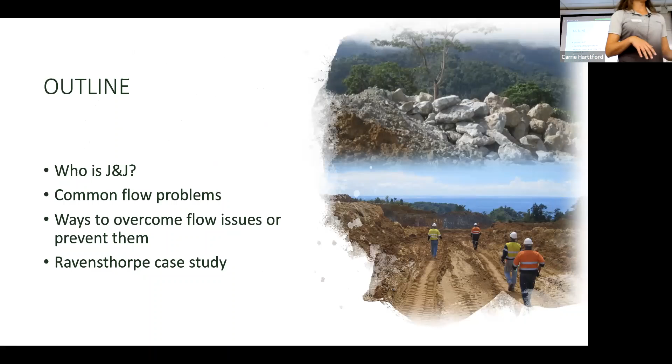Jenike Johanson is a very specialized engineering firm focused on helping our clients handle bulk material through their process. So they know what they want to make, but actually getting it through their process is often what holds back the plant and causes people to use a lot of hammers.

We've been in business for over 55 years. Dr. Jenike came over from Poland during World War II and wanted to make a difference in a field of research. He found that nothing had really been done in the field of bulk solids handling. It was just a black box.

You create a hopper, 30-degree hopper, 60-degree hopper, and hopefully it works. And if not, you just bang the heck out of it. He found that really no science had been applied to that.

So he went to the University of Utah in the 50s and 60s and developed this whole theory of solids flow, kind of the equivalent of Bernoulli's equation for liquids. He developed the equations for powders, dirt. And that's a science that's still used today.

We have offices all over the world: Australia, Brazil, Chile, Canada, an office in Houston, and our headquarters is in Massachusetts. Pop quiz: which office did I open up?

Australia. I did open up the Australia office. Ding, ding, ding. So, open that up about 10 years ago. I was there for 3 years with the family and got up and running. It's still going well. Lots of mining in Australia, to say the least.

So everything from on-site inspections—maybe there's something currently going wrong with our clients' plants—we figure out, kind of like the doctors, I call in the doctor, figure out what's going on. We run some tests to make a diagnosis of the problem, come up with recommendations to solve those problems. And then we can go further into computer simulations, which we'll talk about: discrete element method modeling.

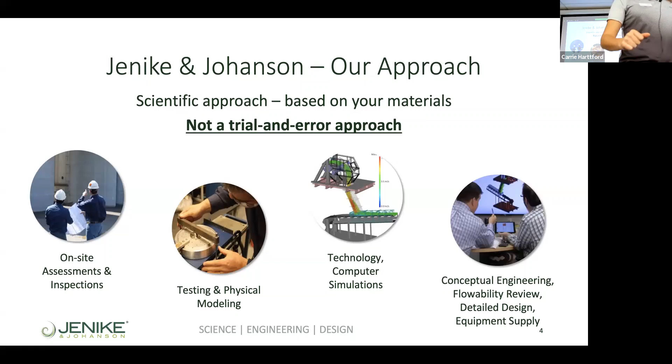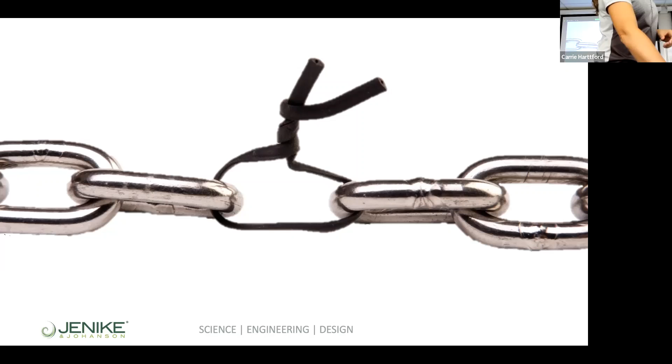So again, all industries, things you wouldn't even think about. Now, we have a chain. Does that look like a strong link? Not very strong, right? So often we find that bulk solids handling is actually the weakest link of the chain.

It's not the glorified part of your process, but yet that is probably the part of the process that will give you the most headaches.

So as you find the ore, you drill it, you blast it, you have nice big pieces of rock over there, easy to handle. As you reduce it in particle size, it can become more difficult to handle, especially based off moisture content, particle size, distribution. But at every step—blasting it, screening it, crushing it—you're adding value to that ore, right?

Because once it's in the ground, it can't add value to anybody. You dig it out, you reduce the particle size, you're adding value. Does that make sense? And that's what you guys are figuring out, right?

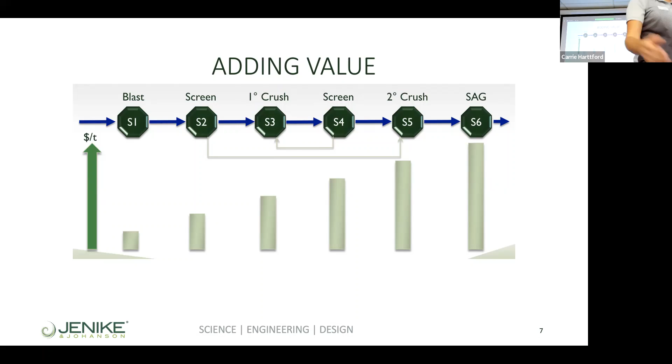But what happens if your material doesn't flow through that system? Then you don't get to add the value as fast as you want. You don't get to make as much money as you want to make.

So this is a very familiar scene to our clients. I love this one because it's very true. So you got the guy trying to bang on the side of the hopper. I'm going to show you some brilliant hopper photos, all dented in.

There's the guy trying to dig it out, and here's the manager. What's he jumping up and down about? This is costing time, right? Time is money, especially for mining, right? The throughput—it's all about throughput. And taking very unsafe actions to make this work, to try and get it to work.

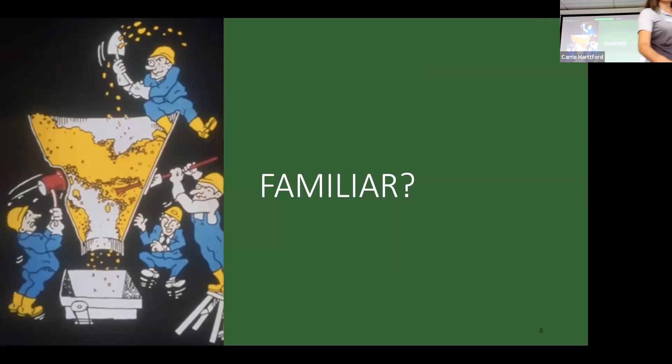So a phrase we say: it's not rocket science. It says, it's time we face reality, my friends—we're not exactly rocket scientists. Look at this, they're rockets.

But we actually say it's more complicated, because the material you're trying to handle can change throughout the process. It can change if the moisture content changes. It can change if you change the particle size. The way it flows changes. So that's what makes it difficult to design for.

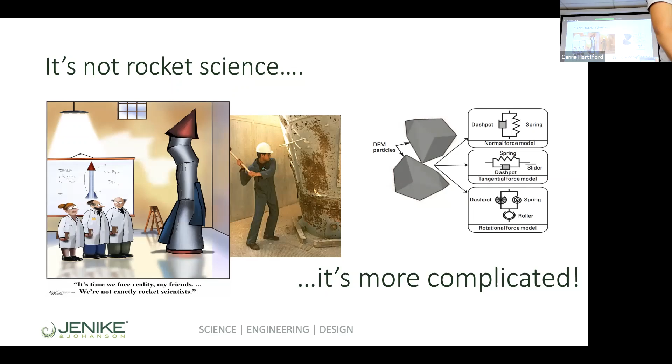Now, when you're going into your projects, your ability to influence your design is the greatest at the beginning, right? There's no steel on the ground. So however you design your whole handling process, you have a great ability to influence it. The cost of making a change is very, very low, as you see in the blue line.

So as you move from the study phase to the execution phase on the x-axis during your project timeline, you can see that cost starts to increase, especially once you freeze that scope. It starts to become more expensive to make changes, and once you start cutting steel, it's very expensive to make changes. Your ability to make positive changes decreases.

But look at the red line, the impact of a bad design. You don't see it, right? You don't see it till you come through the execution phase and you start up. And then what happens when the material doesn't flow through? It doesn't feel very good. It's a challenge. And unless you've lived through that, you as a fresh engineer might think, can't be that hard, I'm fine, I sleep really well at night. But if you've gone through the ringer and it doesn't work, it's a challenge.

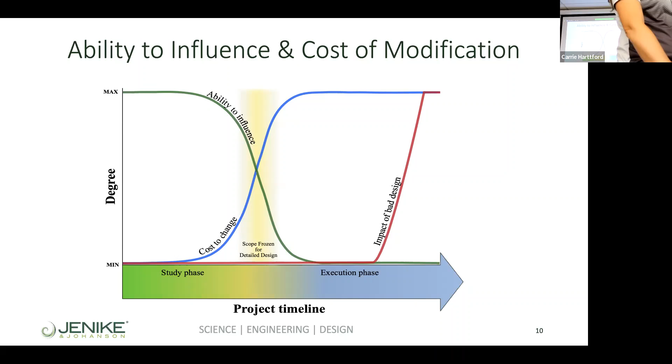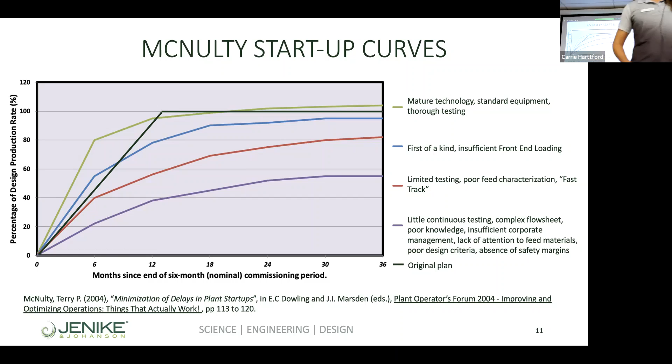Yes, question. So you said it was interaction. You know who Terry is? I do not know him personally. He went to school in California, at USC, but got his master's at Montana Tech, and his PhD at Colorado School of Mines. I just saw him last week. No kidding, well there you go. His curves are still living? Really? Yeah, oh I like it. For those online, I'm repeating this: I've now found out Terry McNulty is very famous in these regions. He went to undergrad at USC in Chemical Engineering, then got his master's at Montana Tech and his PhD at Colorado School of Mines. He's in the National Academy—that's smart, that's awesome, good guy.

So I'm just setting the framework here, right? This is really important.

Because liquids are fairly easy to handle. There's no internal friction—you can't form a pile. If you form a pile of water that's not frozen, let us know, you'll get some bonus points, extra credit. It's not sensitive to pressure, it's incompressible. So the flow behavior is based off the viscosity of the material, which is based off temperature, and you can look up that data.

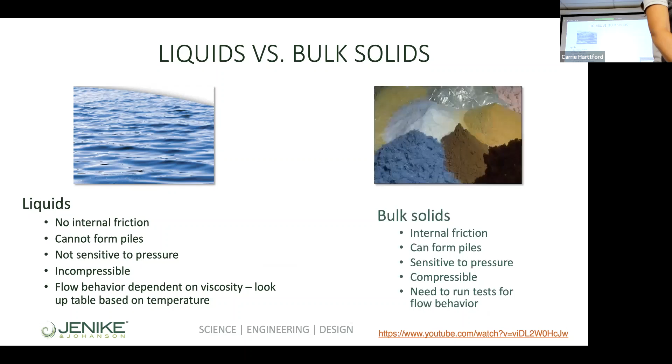But bulk solids have this internal friction component—that's why you can form a pile. It's sensitive to pressure. The cohesive strength and the flowability of it can change based off compressibility and pressure. So then we need to run tests for flow behavior.

I'm going to see if this works or not. If we get any sound, it may not work. Okay, I'm going to be the narration of this. So this is Family Guy, and he's like, I got all this money and I already know what to do with it. Oh, you can't even see it—that's so sad. Well, you guys have seen Family Guy, right? It's so funny, you should have seen this.

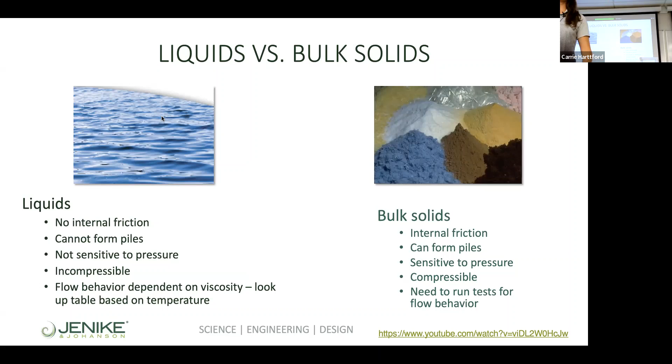Okay, so he gets all this money and he's like, I want to buy a pool full of gold coins and dive into the pool. But anyways, he's like, I'm gonna buy all this, and I'm Scrooge McDuck. I know you guys are young, but he would always dive into these pools of coins and swim as if he's swimming in water, right? So Family Guy's like, well, I'm gonna buy all these gold coins. And then he goes to jump in the gold coins. He's like, ah, it's a hard solid mass, not a liquid.

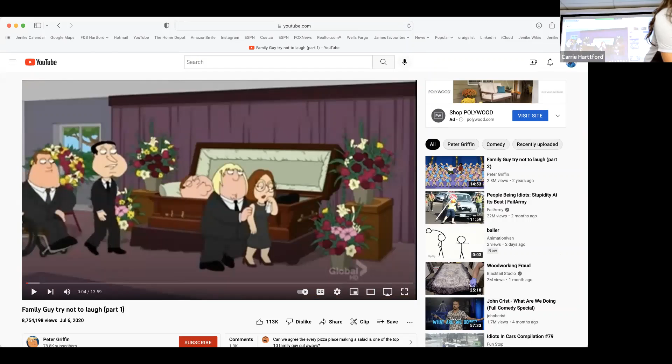Oh, that's the other, hold on, that's a different one. Yeah. Wow, we're just watching Family Guy for the rest of the day. Okay, hold on, let me pull it back up. Sorry, I know it doesn't normally.

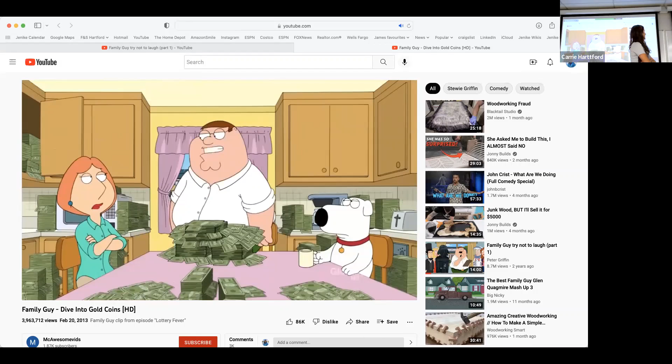We're not gonna go crazy spending our winnings, and we're not gonna let this money change us. What are you talking about? This money is our ticket to the good life, starting now. I just bought a giant room full of gold coins, and I'm gonna dive into it like Scrooge McDuck. It's not a liquid, it's a great many pieces of solid matter that form a hard floor-like surface. Ah!

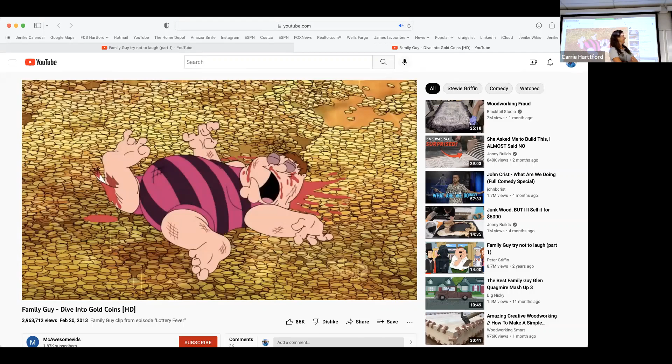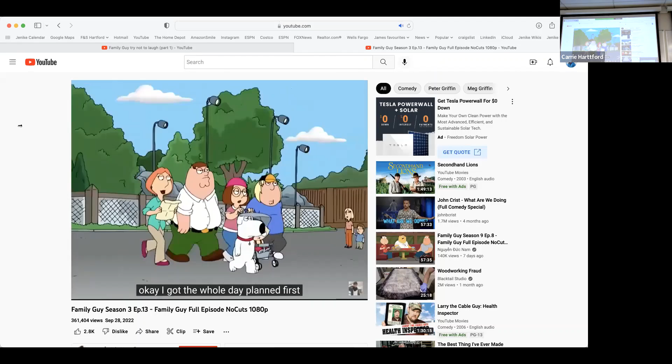Very specific. Just share back your screen again. Okay. Oh, the whole day plan. So anyways, oh, here, select this one, right? Oh yes, thank you, and no.

Fortunately, you guys actually have an advantage because you do hear about bulk solids handling much more in your curriculum. Thank you, professors, for bringing that into the curriculum. But I was never taught about bulk solids handling. I had maybe one session on the Mohr circle about soil strength. And so Jenike is actually a structural engineer who took some ideas from soil strength tests and adapted that for bulk solids flow. So a lot of times we get these problems in plants that we call baked into the plant design. It's already been built. These problems are just there. Operators have somehow figured out how to try and keep material moving through the process, baked in. So a lot of the causes for that is just the flow material properties were not tested to be informed in the design basis. Maybe they borrowed values from a library.

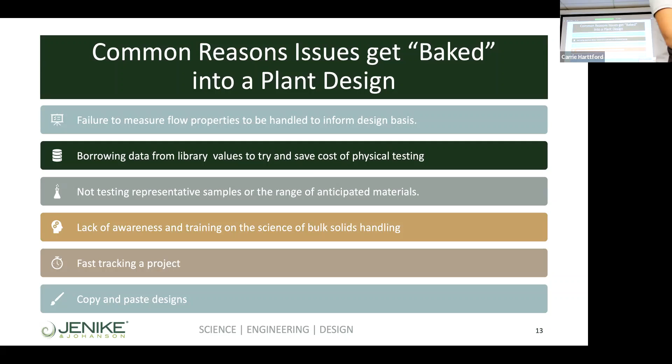So I'll just borrow those values, use it for this project, not a problem. Maybe it wasn't representative samples. I know it's challenging in a new mine. Sometimes you only have core samples and you do what you can and do the best there. But a lot of times there's just a lack of awareness, fast tracking a project, copying and pasting a design. Try not to fall into this. You're trying to do these front end studies, and then you're like, I don't know what it's really going to look like, let's copy and paste another design. And then you get through their pre-feasibility study and nobody actually goes back to look at why that design was initially selected. Doesn't mean it was the right design for that project. It just kind of was a placeholder and then never looked at again.

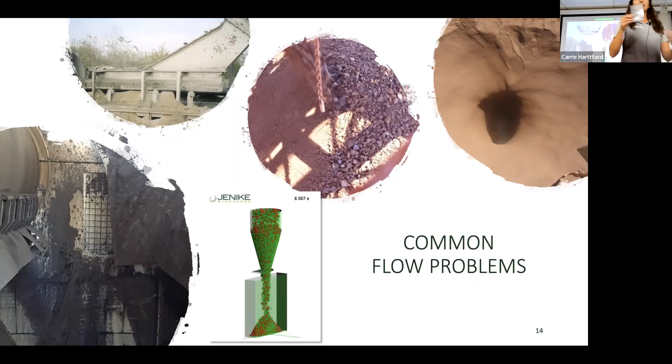So common flow problems we see are blocked transfer chutes. We see segregation issues. So this is a DEM run of basically the model that you have here. You may have a nice blend of material, and simply by discharging it into a pile, any kind of stockpile, you're going to have your fines separated from your coarse particles. So you can see how the fines now are all in the center and the coarse are all on the outside. Now, depending on how you draw out of that pile, you may get a lot of fine material followed by a lot of coarse material, and that could have an effect on how material flows.

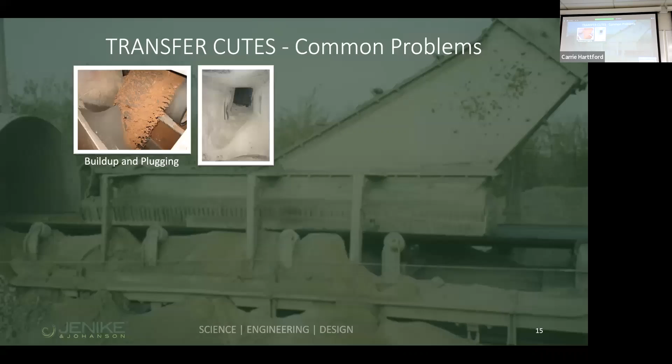Transfer chutes, do you guys ever get involved in the design of transfer chutes? Ore passes, absolutely. Buildup and plugging, spillage, dust generation. I did not change the coloring in that photo. I took that in Australia, that alumina and just the lighting of the green, and then all the dust in the air, and I was like, that doesn't look good or safe for anybody to breathe.

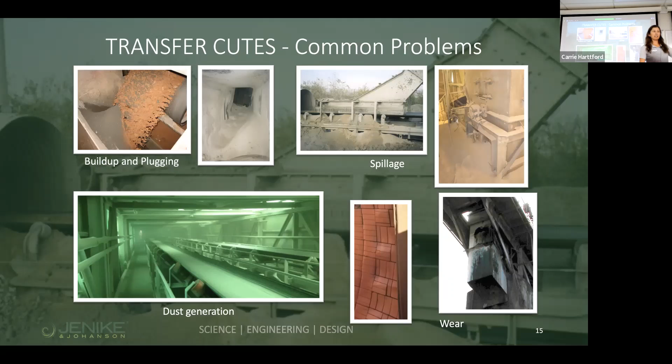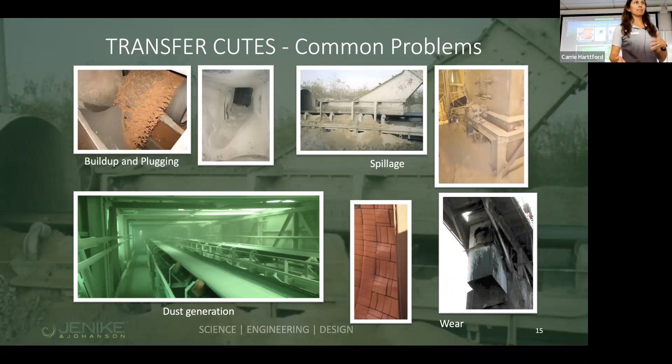Wear - if your chute's not plugging, that means material's moving through it, but it also means that the liners can wear out. In Australia, they would have these ceramic liners that were about 4 inches thick. Very expensive. Alumina ceramic liners are very wear resistant. They would sometimes burn through those in 12 weeks. 4 inches in 12 weeks. That's very high, that's expensive, and they have to shut down, but they're also putting through 12,000 to 15,000 tons per hour in these export terminals. 12,000 tons per hour, it's phenomenal.

So we do use DEM, we apply that to chute design, but with DEM, garbage in, garbage out. You can put any parameters you want in there, you can make any pretty picture you want, but what's most important is that that pretty picture matches reality. So using the test data that we're going to talk about can be inputs for that DEM design, so it responds how we would expect the material to respond.

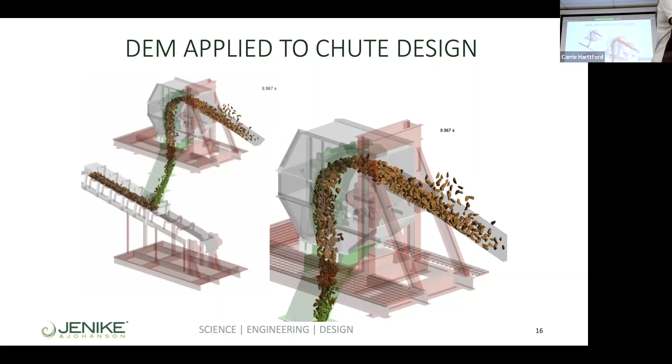Why do they call that rat holes? Good question. I think because it looks like a little rat ate its way down, it makes a hole, a little rat hole. I was in Mexico and that's how they explained it. I thought, fair enough. Sometimes it's called piping, that's a really old name for that. Jenike in his work, Bulletin 123 that he published, would say piping. Now we call it a rat hole.

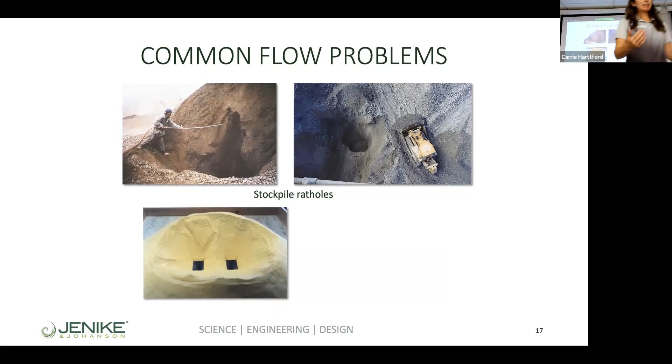Oftentimes you look at a stockpile design and it has nice big open flow channels and everything looks beautiful. But then you start up the plant and all of a sudden you have these two stable rat holes, very limited live capacity. What changed? Maybe the particle size, maybe the moisture content, maybe the clay content you had in the sample.

We look at caking, and not the good kind of cake like chocolate cake, vanilla cake. This is where powders stick together. Anyone ever have, you guys are kind of dry air up here, but salt caking together or sugar caking? That's because moisture has come in and caused crystal or liquid bridges to form between particles. Those dry out, become crystalline bridges, and now you have a caked particle. They can get very, very, very hard.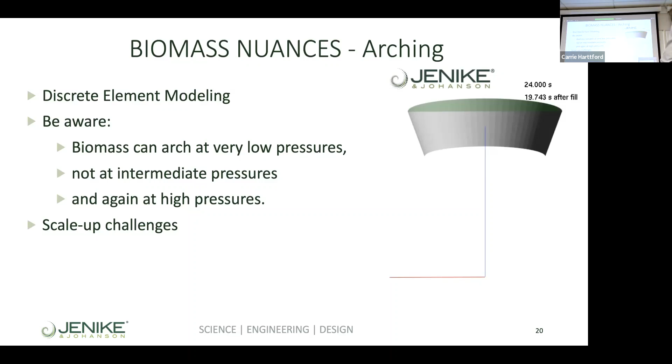In a very practical aspect, think of your Gatorade powder. You want the same color Gatorade and sweetness every time you add the powder, or maybe a Via blend coffee, you want it to taste the same every single time. But if that segregates, you may get something that's too sugary and not sweet enough, or maybe not the right coloring, and you get that inconsistent blend, and they don't want to sell you that type of product.

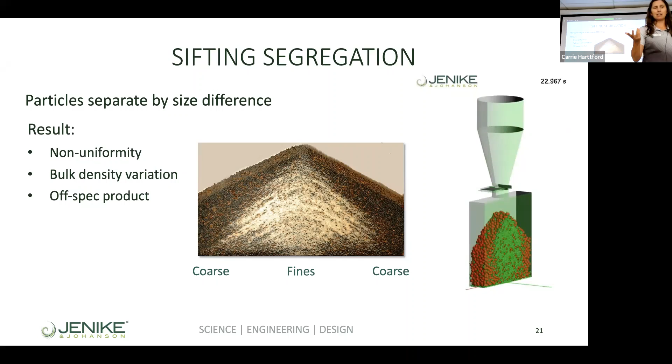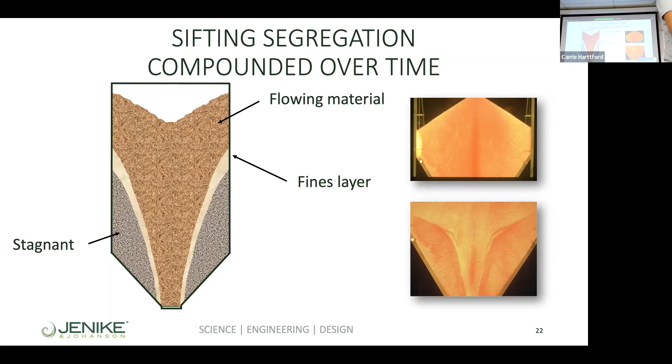Fluidization segregation. So this model is showing side to side sifting segregation, a difference of particle sizes. Fluidization segregation is more where you have this air interaction of the particles, where the coarse go to the bottom and the fines rise to the top. That's quite common in a pharmaceutical application.

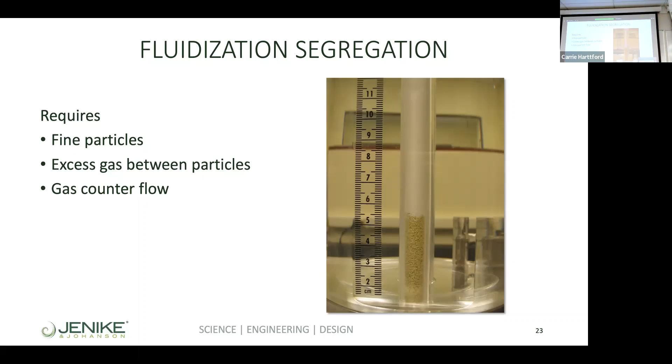Some powder material has dusting segregation. When you fill up some type of bin or fill up trucks, you'll see a bunch of dust, and that's going to accumulate and settle around the edges.

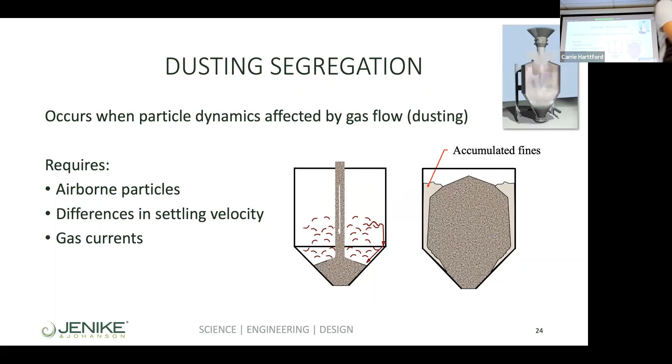So flowability, I keep talking about this thing called flowability. What does that mean? This material flows, you hope it flows. Well, when we talk about flowability, it's really a function of the material itself as well as the equipment you put it into. So you can have material that seems very difficult to handle, but you put it in the correct equipment, handle it the correct way, and it works really well. You can have material that seems very easy to handle, so not much thought is put into the equipment, you put in the absolutely wrong piece of equipment, and it doesn't flow well.

We had a client one time, about 18 years ago, we did this big design, very fine powder, very difficult to handle. So we used this air-assisted discharge, a very unique design to handle this powder. As a result, we just went back to site recently and they're like, yeah, it's worked from day one, it just works. I was talking to one of the younger engineers, he's like, yeah, I think we just have easy material to handle, it just kind of works, we don't have any issues. I said, well, that's not true, because here's actually one of the more difficult ones, but you have the correct equipment for it, so it appears to be easy to handle.

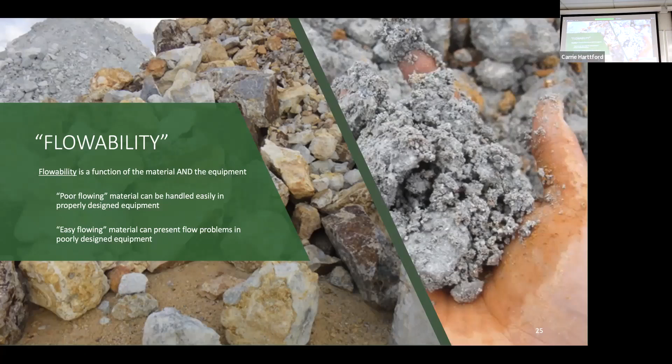So in our models, the default flow pattern through any kind of bin or silo would be funnel flow. You guys familiar with the term funnel flow? Raise your hand, this is your exercise component of the night.

In funnel flow, whenever you discharge, material is going through the center, it's funneling in on itself, it's stagnant on the outside. You can actually get material to stay like a rat hole. There's a good demonstration, well done right there, he's got his rat hole. Congratulations, we inject tiny rats inside of these and they create the hole. Just kidding, there's no tiny rats in your thing. But sometimes you got to tap it a little bit, so it's funneling in on itself and then it's done.

This doesn't seem very hard to handle, does it? It's not bad. But then here comes the sledgehammer. Yeah, it's stuck again, here comes the sledgehammer again. It's just not a very reliable flow.

In that stagnant area, material can cake and gain strength over time, it can degrade over time. For example, flour one time led to some salmonella poisoning in the end product, the baked good, and they traced it all the way back to stagnant flour in the silos. A bulk material handling problem caused people to be sick. We don't want that to happen.

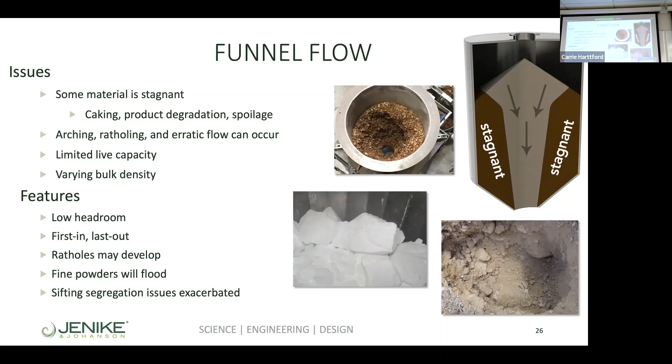But you know, this could be a flat bottom bin, like a stockpile. Very shallow, you don't get wear along the walls. So it can be an appropriate flow pattern if the material doesn't degrade over time, if it's not a fine powder.

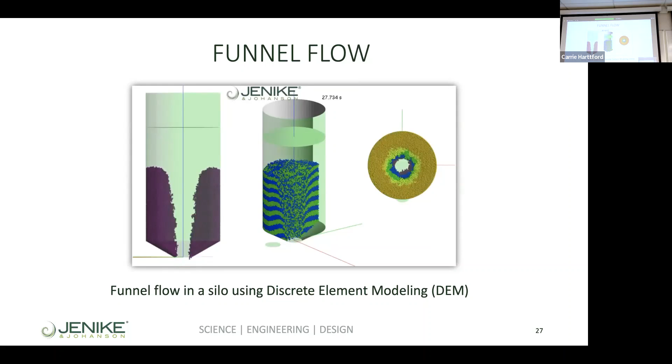So the other flow pattern is mass flow. You have a smooth, steep hopper wall, and as you discharge, all that material is in motion. Everything is in motion, so you can no longer have a stable rat hole form by definition, right? There's nothing stagnant. Whatever you put in first comes out first, the FIFO flow pattern, first in, first out. If you have fine powders and you introduce it, there's time for material to de-aerate on that top surface as it goes through.

Now, if you have fines and coarse in mass flow, what do you think will happen with your fines and your coarse material?

What's that? Stay mixed. So it's going to recombine at the outlet. Good job, give them an extra cookie. Yeah, so it's going to recombine at the outlet, right? Everything's in motion. Sorry, there's no cookies. I got you on that one.

So mass flow minimizes the side-to-side sifting segregation, and gives a much more uniform feed, you're in control of your bulk density. So if you have cohesive material that can segregate and degrade, it's really important.

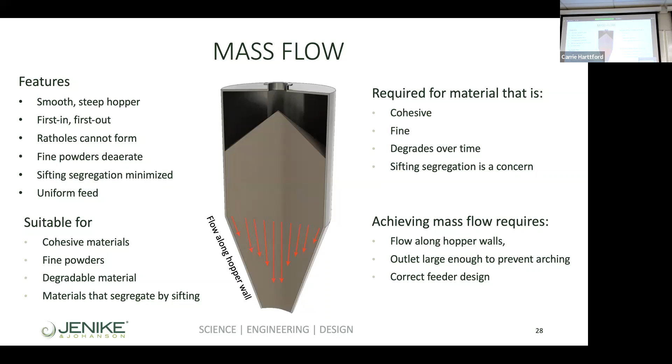So if we want to achieve mass flow, because this is not going to happen just by accident, you actually have to design for this. I can find material that will be in funnel flow with this angle. There's not a magical angle, we'll talk about that. So we have to do the material testing for that.

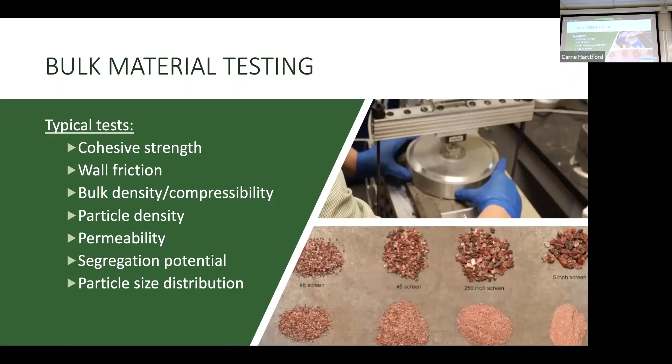So let's go through these tests. If you want to design in mass flow, you don't want the material to arch over the outlet, so we need to understand the cohesive strength of the material. We need to understand the frictional nature, because this wall has to be steep enough and smooth enough that particles actually move along that surface. We need bulk density, particle density. It's a whole slew of tests that can be done to understand how material is characterized.

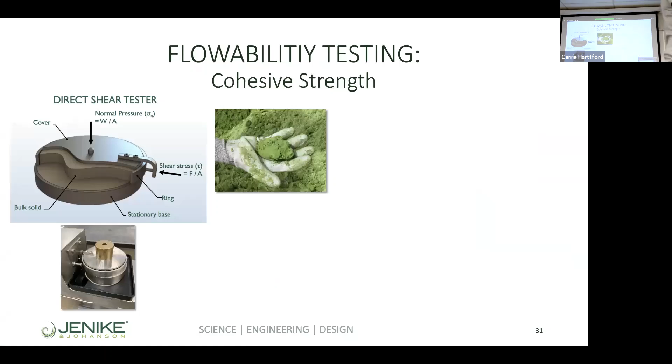So there's ways to test that. There's a Jenike shear tester that's been developed. There's a ring shear tester that's been developed. And basically, you guys see snow out here sometimes, I hear?

From California, we don't see snow much. We see sand. I live by the beach.

It's lovely. So if you take snow and just pick it up, there's not much strength to it. But if you want to make a snowball, you squeeze it. Because of that consolidating pressure, you've changed the cohesive strength of that snow. If you really want a good snowball, you pack it, changing the cohesive strength again. And if you really want to peg somebody, you add rocks - just kidding, I didn't say that. You're changing how strong that material is.

So now we need to measure that strength of that material as a function of consolidating pressure. So next time you're in a snowball fight, be like, hold on, I need to add some consolidating pressure to my snowball so I can get you. Don't do that - they'll peg you before you get there.

So what we're doing with this tester is creating a consolidated area within this cell, and we're applying a force, the pressure. We're measuring the force required for that material to actually shear and fail across itself.

Jenike said material will flow out of this outlet without bridging if the stresses on that material are greater than the strength of the material. So if you have a pen, there's some inherent strength to it, and if you apply enough stress, you're going to break that pen.

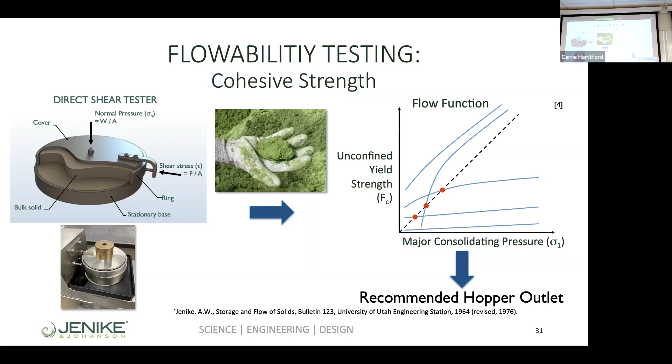Jenike's theory is, if we can figure out how strong the material is, and how much stress is being applied to it, we can figure out how big you need the opening to be so the material doesn't bridge. There's science here. So you can measure it and come up with outlet dimensions to overcome arching. If you do need to design in funnel flow, how big does this opening need to be so the rat hole will continue to not be stable and continue to fall in on itself.

So the strength of the material can change with time at rest. For this example, we have powder A, BC for conical. This outlet dimension here would be like 0.1 feet. So if you didn't want it to bridge, you'd have to design it greater than 0.1 feet as an opening.

Now, if you let it sit for 1 day, then it's 0.5 feet. If you let it sit for 3 days, you see stars - that means gravity alone is not going to allow this material to discharge. It's caked, it's gained so much strength, forget about it, it's not coming out of this bin. How nice is that to know the scientific data for this material? Then you can properly design your system.

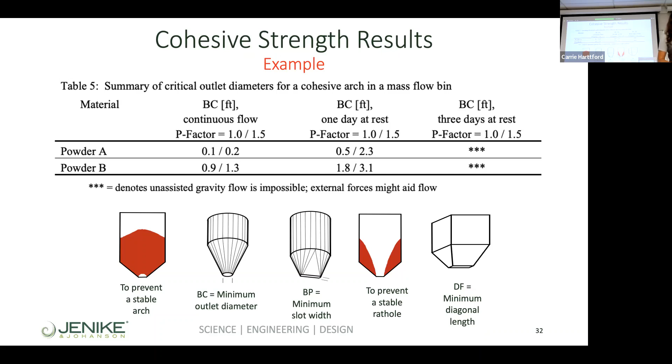There's a lot to this. We teach 2-day courses on this. You're getting it in a quick 20 minutes, 30 minutes.

The other half of the equation is wall friction. As this material moves along that surface, we need to measure the frictional nature of that particle against that surface. Then we come out with a dimension called our wall friction angle, phi prime. If you take the tangent of phi prime, that's mu, your coefficient of sliding friction.

Remember physics class, you have a block on an incline, you have that friction factor. Sound familiar? There's a lot of those problems you have to do. So this is that measurement - what is the friction between that particle and that surface. Then there are lookup charts relating wall friction angle versus your outlet size. What angle do you need for mass flow to occur? It's not one magical angle.

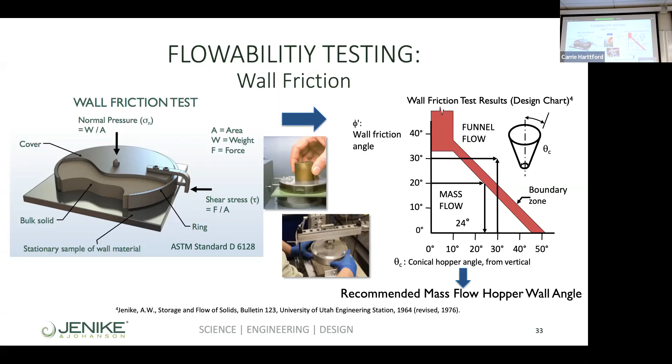Obviously in mining, you don't always want to go to a plastic, depending on the material. Concentrates might have it, your ore probably not so much. All I'm saying here is it's important to test these different liners and considerations to actually have data to design from.

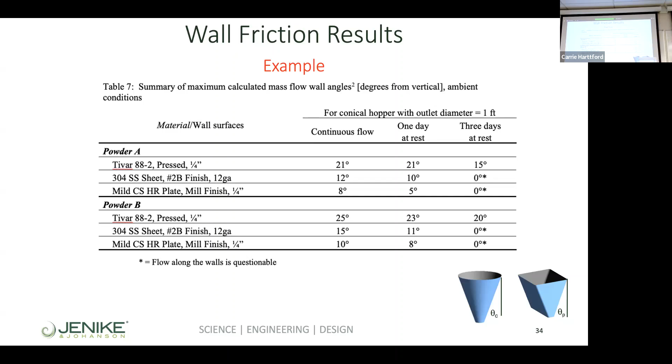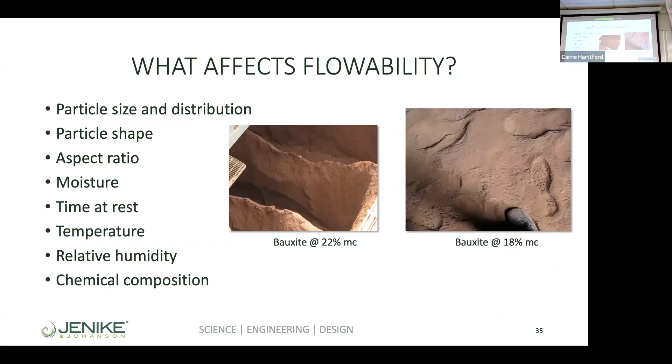Well, they would dry it down to 18%, only a 4% difference in moisture content, and look at the material now. It was like moon dust. That's my foot there, I made a mess. The other guy's like, whoa dude, oh you dusted me out.

What a big difference. So if you have data on bauxite at 18%, you're like, hey, this has no strength, we're good. But you're actually handling it at 22%, completely different material. You have to consider that and match the process conditions. So you want to test at that range of moisture contents you might be considering.

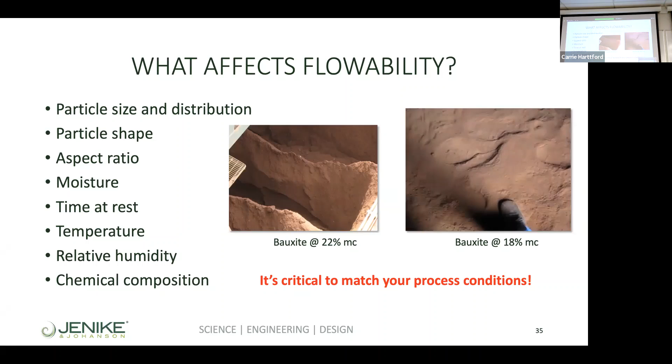We also have a tester to look at wear. What happens when you wear a surface? Does it actually become smoother? Because people are like, well, it's going to smooth up, it'll be better after we start running. But for one, if you don't get that initial flow along the wall, it's not going to get any better because it's just stuck to the wall.

And two, it could either make a surface rougher, like you see with this carbon steel before and after with bauxite testing, or there's stainless steel after a magnetite concentrate where it just smoothed it up such that it was like a mirror finish.

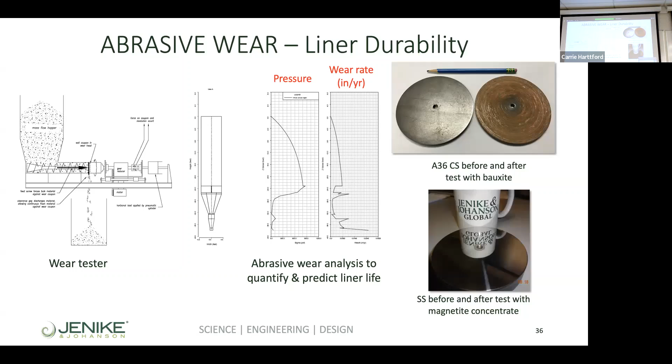So then the wear test data, those wear values can go into our DEM programs now to estimate wear. We did this pretty unique design because a lot of times in mining, you have material that is abrasive and also sticky. So in your transfer chute designs, you really have to consider how you're going to handle that.

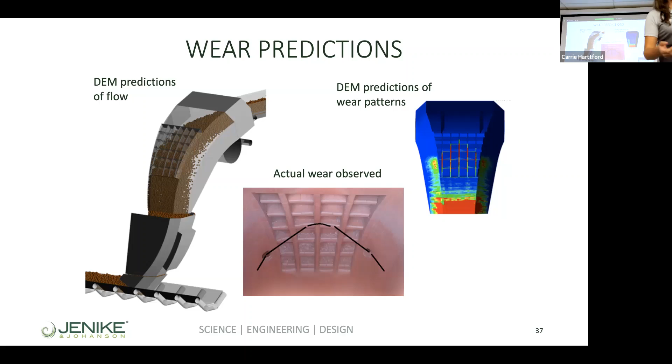Now you have hoppers, you have feeders that need to go underneath, and it has to make sure that you pull from the entire hopper outlet. One of the biggest things we see go wrong in the mining world is that a hopper or bin is built and then they just have a gate open in the front and the material just pulls through either the back or the front, a small little hole, a rat hole, versus utilizing the entire hopper.

There has to be this interface. I don't have a lot of time to go into all the details, but it has to increase in capacity from the back to the front so material can feed through the entire hopper outlet. There has to be these interfaces, there has to be that proper design. It may seem like a very small thing, but you can have what it looks like a great hopper, but if you don't have the interface, you're back into your funnel flow regime.

Same thing with screw feeders.

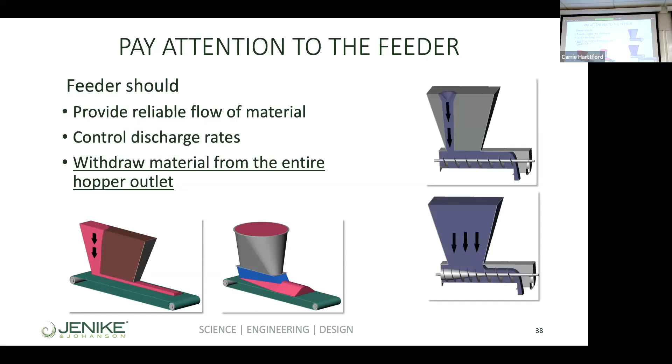So what, I've been yapping at you guys. So what, right? Well, let's look at this case study. Anyone studied Ravensthorpe? This would be a good one for the classes. So Ravensthorpe started doing some study period in 1998, all the way to scale up around 2010.

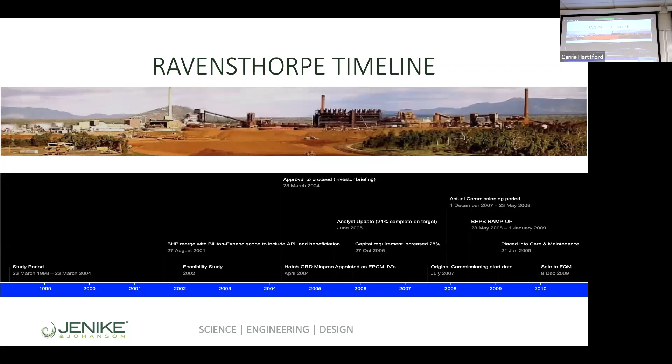And in the study phase, they studied this for a long time, 6 years. Did a lot of work. None of you caught that, by the way, I don't think. Okay good, 6 years. They did 8 months of continuous piloting. They spent a lot of money on this, really, really top-notch pilot scale.

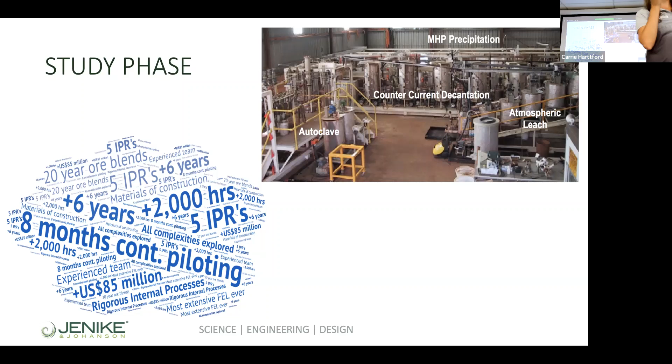But where was the problem? Turns out the problem ended up being in between each step. So people were looking at their individual phase, but there was a lack of continuous knowledge through the entire phase of the bulk materials handling. They're looking at their process, yes we are able to convert this material into the precious metal that we want to have, but looking at how are you going to actually handle it, there was no focus on the flow through the entire system.

The laterite ores are known to be sticky. That front end comminution and beneficiation circuit was a generic design, a copy and paste generic design. It was not accounted for the sticky material, and as a result it only operated at 35% of the nameplate ore throughput.

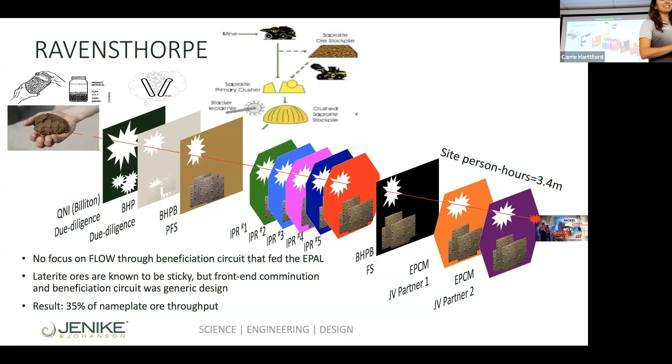35%. Is that good? What percent do you want to be at? 100. And then they want you to go higher.

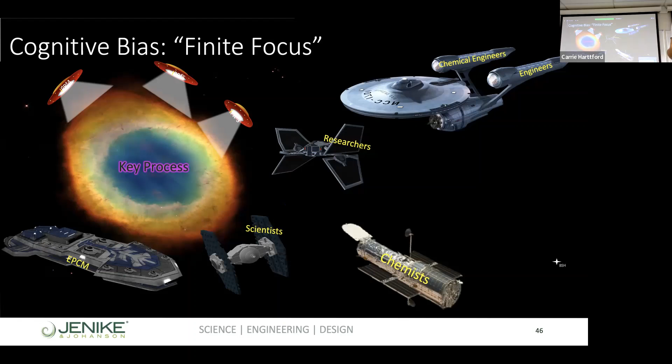So what happened? We believe, and the studies have concluded, it was a cognitive bias. Everyone gets very focused on the process. Here's your key process - people like Star Wars are all focused on the key process. Anyone see this little star? That's the bulk solids handling component. Nobody's looking at that. They just didn't even pay attention to that part in this case.

I was presenting this at an engineering firm, and one of the ladies said, I was on that project and you were absolutely correct. I'm glad she said I was correct. But she said it was terrible - we worked so hard on this project and to have it not work is just devastating.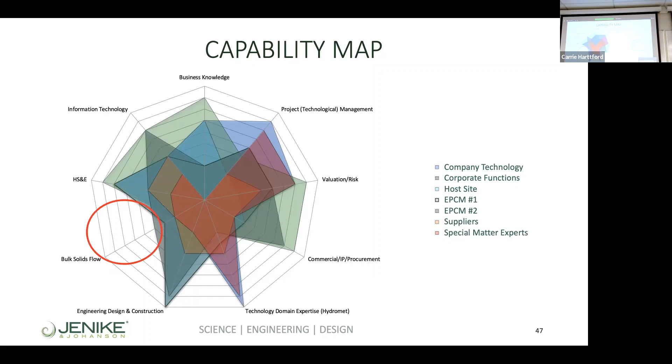So when you do get on a project team and get involved in these processes, make sure everything is being accounted for, not just your little section. We do that with a technique called capability mapping. You have your HS&E, your process, your engineering firms - all these components. Make sure somebody is focused on bulk solids flow.

So they made a bunch of changes, trying to get this to work. These are articles that were published: 'The changes we have made have been far-reaching but fairly obvious. In hindsight, we quickly realized that the hydrometallurgical plant had been very well designed - one of the highest quality. All the problems were at the front end, particularly in the crushing and materials handling components.'

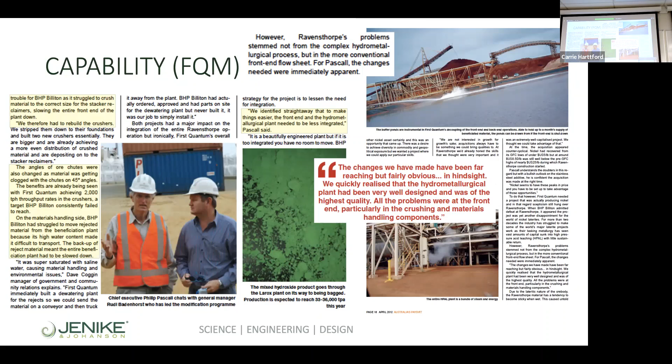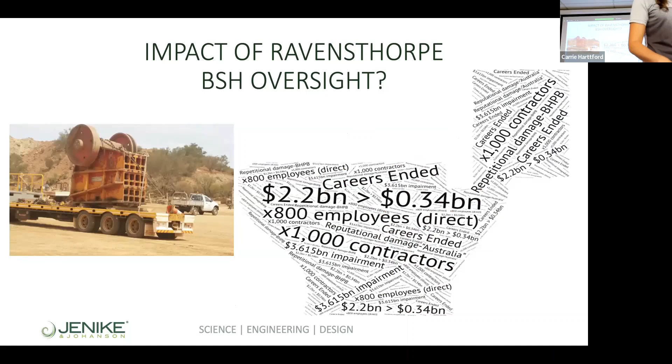So important - the impact of that, they had to just tear out equipment. They spent over $2.2 billion on this, with over 1,000 contractors. So make sure we know what's happening, understand the material flow, talk to your team.

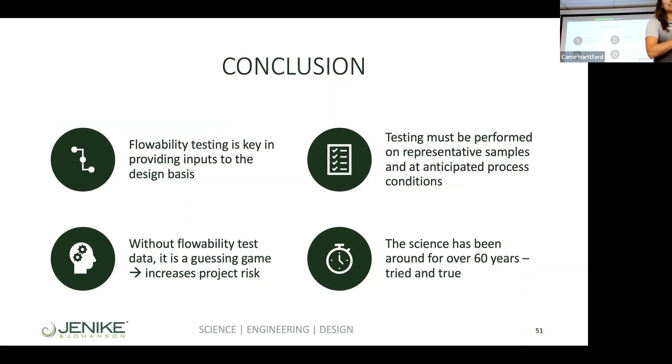There's data. I just want you guys to understand - I know you're early in your careers, still in school, but this is really, really important that somebody has to be focused on this. Does that make sense? The science is there.

Any questions? Yes, in the middle. Should that biomass be included - is there anything else you found that's really resistant to flow and always has a problem? Good question. What the question is, are there other materials that always seem to cause problems?

In the mining world, the higher the clay content of your ore, the more likelihood you're going to have problems. Pay attention to that - as you move through your mine, you may come to pockets with higher clay content in your ore, because clay is just sticky, doesn't want to move. When I was in Australia, the operators would say, yeah, I pick up that ore and throw it against the wall - if it sticks, I know it's a bad day. If it doesn't stick, it's a good day.

So it's putting science to that movement. Biomass is definitely one that humbles you, and you really need to know what you're doing. The scale up of biomass is very tricky - you may have figured out how to handle it at small scale because there's not great pressure on it, and then they scale up to these big processes, and all of a sudden they just can't get the material out. Good question.

Curved instead of just straight? Yeah, so at some point you have to look at your feeder. There's lots I could talk to you about this, but a conical hopper is the most restrictive way to handle a material - it's the most unforgiving. If you think of a conical shape like this, all of us trying to rush out of one door doesn't go well, we interlock - all the particles are trying to move down to that point. If you go through a planar hopper instead, and open up this side of the wall, we can all exit quite easily.